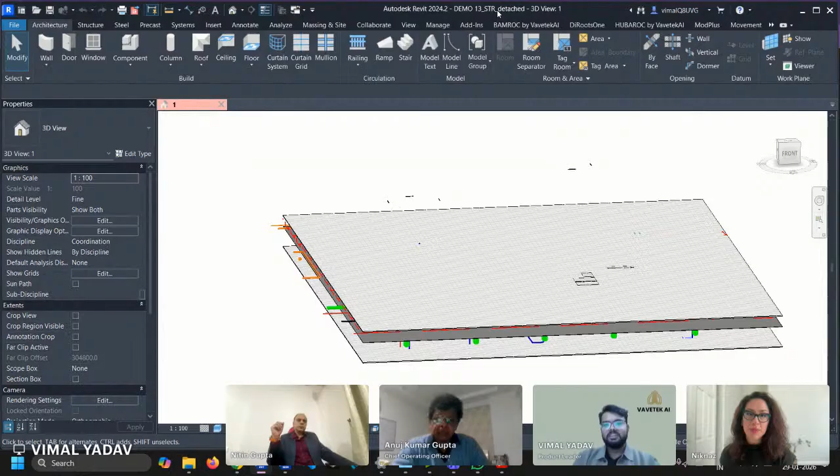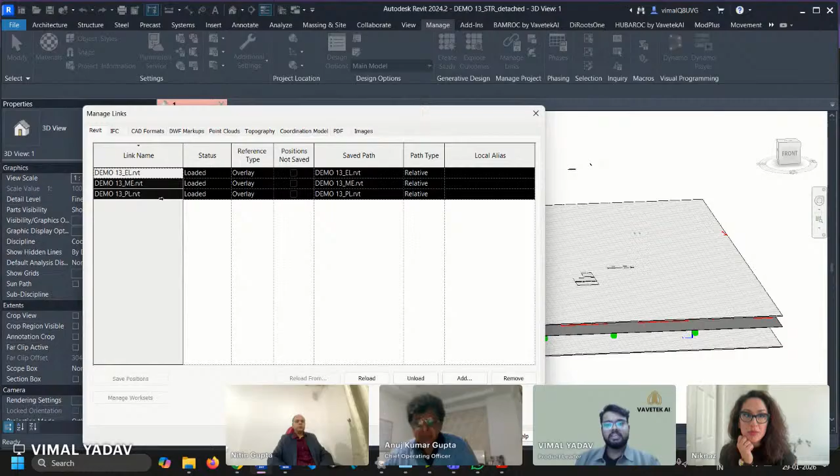Right now we have a structure file here, and what I've done is linked all the MEP files — electrical, mechanical, and plumbing — all linked together. Before running BAMROC, first I want to detect clashes, so I've already taken a Navis export of this. I'll simply use Navisworks to detect those clashes. Let me simply append these files, which would be here.

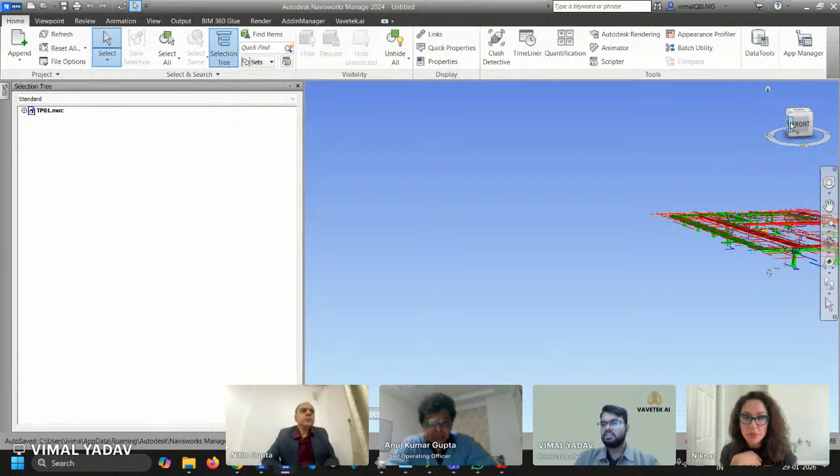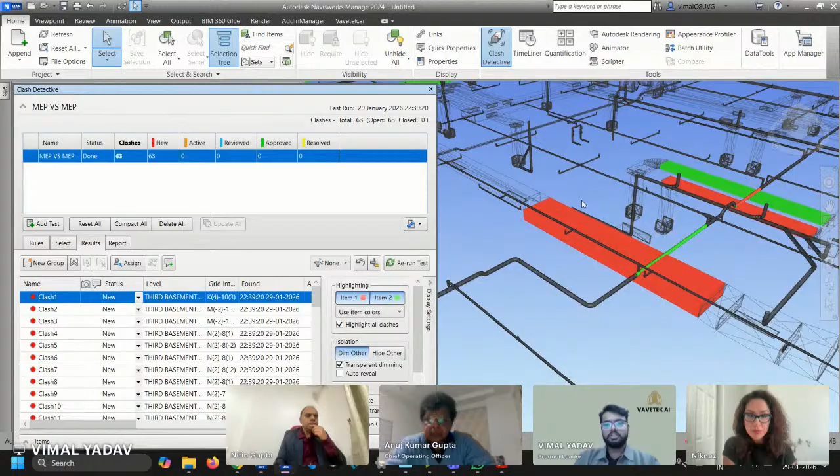So this TP01 file represents the before situation of the model. Right now we have all the MEP here. What I'll be doing is running a simple MEP versus MEP clash test. Okay, great, so we have about 63 clashes in this particular model.

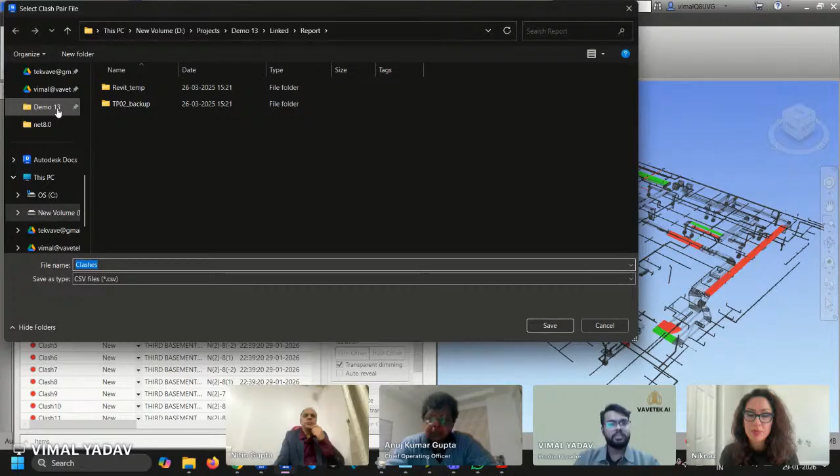Now the next step is to create a report of these clashes, and then we'll be running BAMROC. We have our own plugin here within Navisworks, and this BAMROC clash file is going to create that report for me. I'll replace this existing file.

Okay, great, so we have generated the clash test. We have generated the report as well. We can head back to Revit and run BAMROC.

Now, first of all, I need to check on this section box. This is important to run BAMROC. Also, this is helpful in running a particular portion of the project. So using BAMROC, you can resolve clashes floor by floor, tower by tower, or just in the corridor. All you have to do is adjust the section box and BAMROC will take care of the rest.

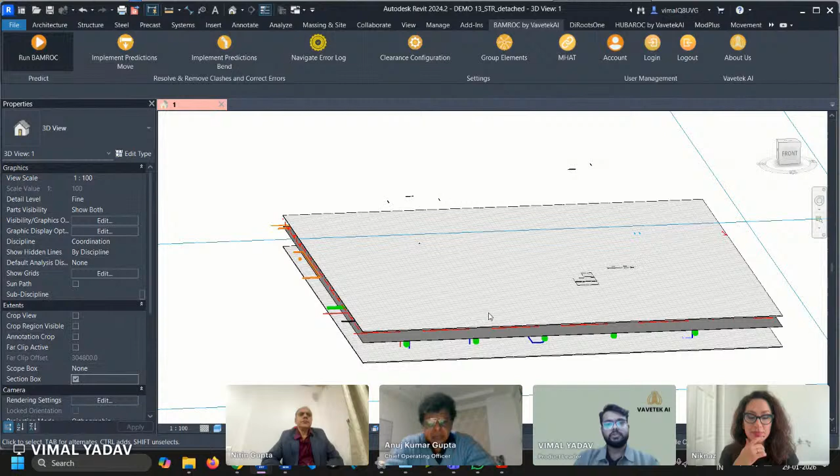So now I'll simply click this Run BAMROC button. There are some guidelines, I'll quickly jump through them. First is that I need to link all the files.

As you saw earlier, I had opened the structure file and linked all the others. So if I have an architecture file and interior design file, I need to link those as well, so that the software has the right context of where exactly the boundaries of the false ceiling, of the floor slab, or just the walls are.

Now, second point is regarding those projects where you might not have a false ceiling, such as basement car parkings or office spaces. What we recommend is you simply draw a reference false ceiling at the minimum clear height, so that BAMROC knows that this is the final limit where the MEP can go.

Now, third and fourth point are just an extension of this. What BAMROC is doing is resolving clashes in the false ceiling area. So we want our MEP systems to be within the floor slab, within the false ceiling, and the external boundary walls. Now, fifth point, very important.

We see across the industry in all the projects, engineers will model out these MEP systems but would not connect the elements properly. That creates a problem since then BAMROC is understanding a single system as multiple systems, and it cannot adjust those systems properly. It might go haywire.

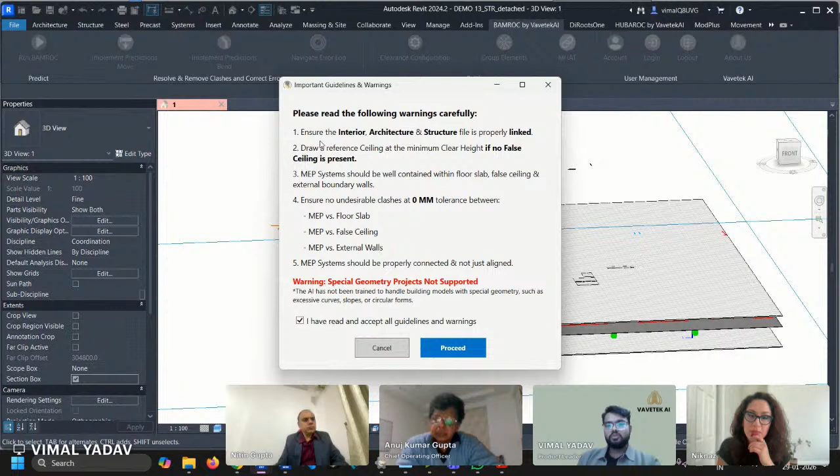Now, I would like to mention here that right now BAMROC has been made to handle the majority of the projects happening in the world, but there are some boutique projects with special geometry which BAMROC cannot handle at the moment. So that's a limitation. Something like buildings by Zaha Hadid are some of those. Anyway, we'll proceed now.

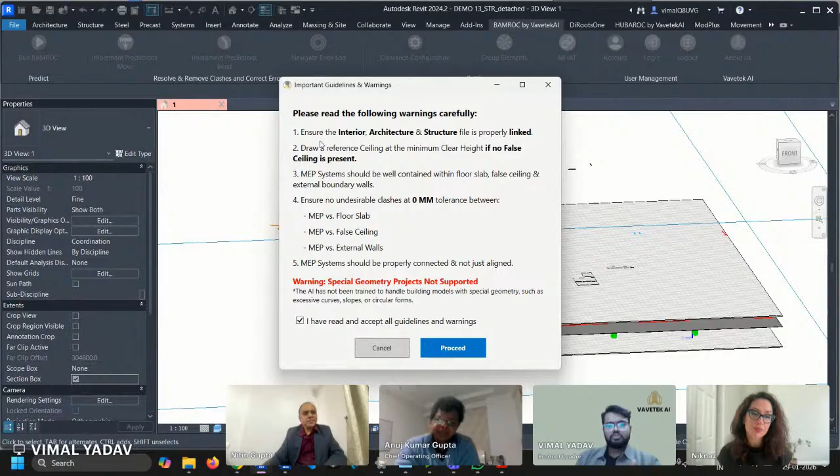Okay, so this is a health check. I'll come back to this later. I'll close this, and now I get to choose from these two strategies.

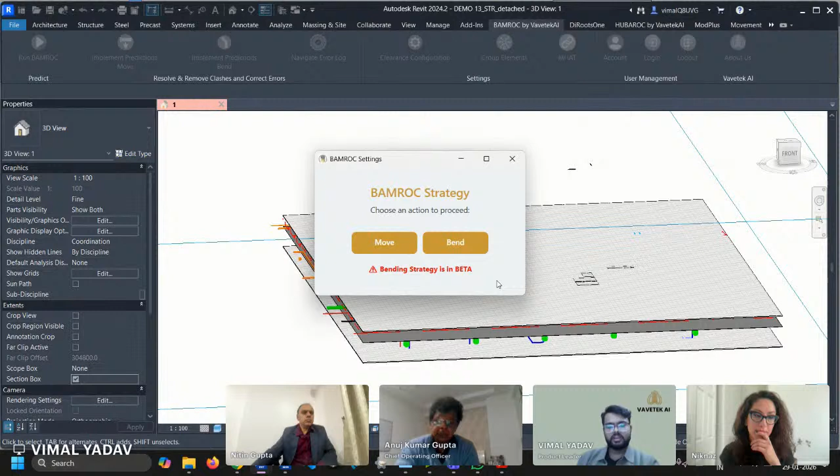So move and bend. As the naming suggests, move is going to move the elements, and bend is going to bend the elements or systems to resolve the clashes. I would also like to mention that BAMROC fundamentally does not create new clashes. You can use either of these strategies or algorithms. For now, I'll go ahead with move.

Okay, so it's asking me, is the project north-south aligned? Yes, it is. If it is not north-south aligned, you can simply rotate your section box and it will just work fine. Now I can choose the performance mode for this project.

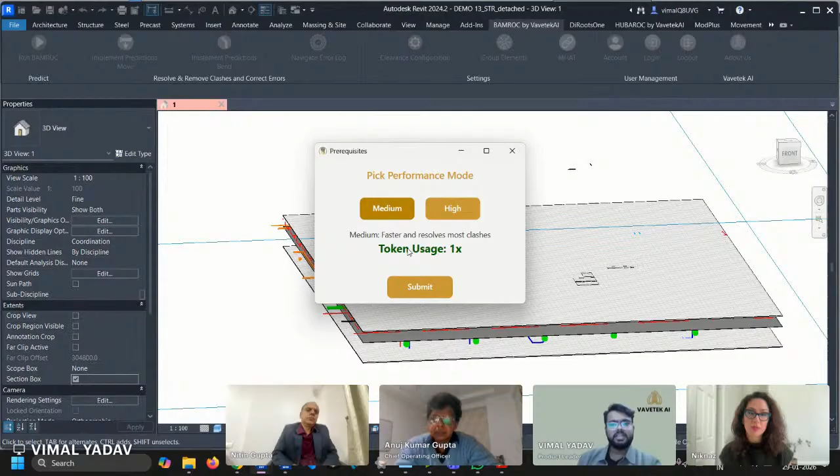Now this is a simple project, not a lot of density in the clashes, but if you have a lot of congestion in the MEP systems, you can use the high mode to resolve even more clashes. It thinks almost 10 steps ahead of the medium performance mode. Let me just hit submit.

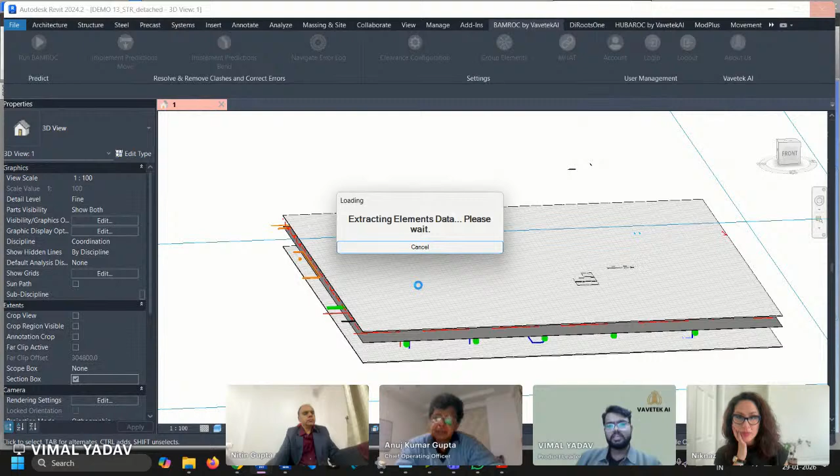Right now it is basically collecting the geometrical, mathematical information from the models. So it's collecting all the information, the geometry of your walls, of your false ceiling, of your MEP systems, everything. So this shouldn't take long.

Almost done, I'll go ahead. Okay, so we have 4 Revit files here, but BAMROC can handle almost 20 or 25 Revit files. If your own machine can load these files, you can link them. It's perfectly fine for us.

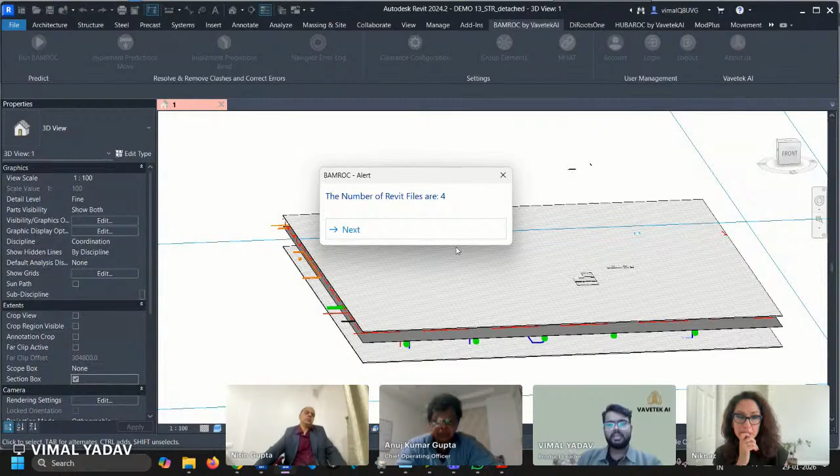Okay, now I need to upload the clash file. This is the same clash file that we generated earlier. I'll click yes.

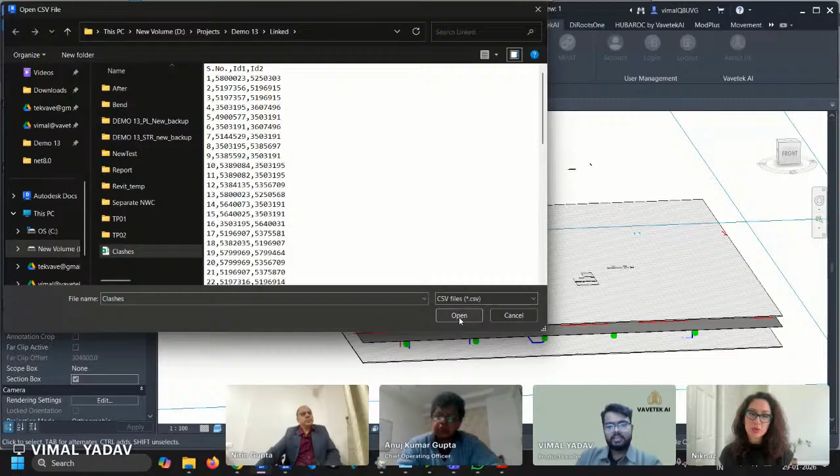And let's actually take a look at this also. So you can see this clash file is nothing fancy, just element IDs of the clashing elements. I'll simply open this. Okay, so this is a small project, 4,000 elements, but we have worked with hundreds of thousands of elements also.

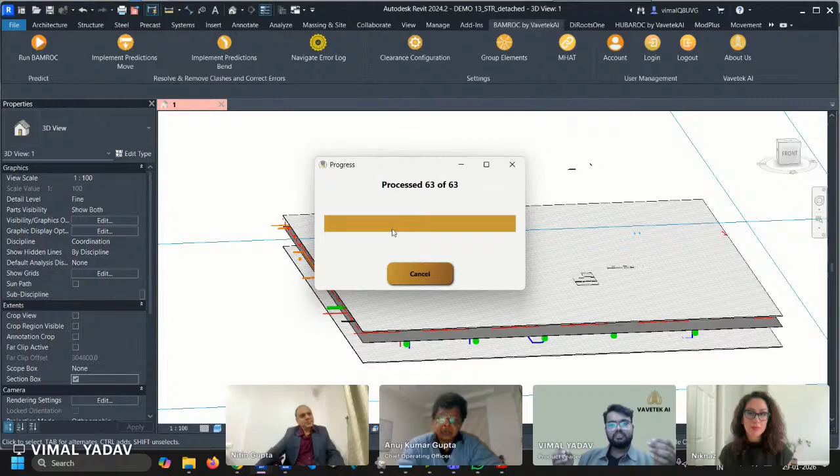So size of the project is not a problem. Okay, tokens we can come to later on. Now here's the magic happening in the cloud. All these clashes are getting processed on the cloud, and BAMROC will one by one generate predictions for all of these clashes, and download a prediction file in my downloads folder. For this project, it's almost ready. For much larger projects with thousands of clashes, it could take 20 to 30 minutes or so.

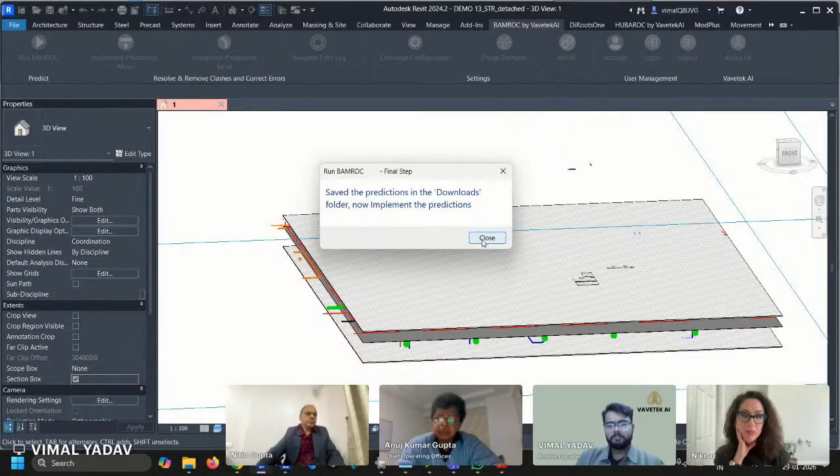Okay, this is also fine. Now, this is an interesting part. Till now, my model has not really changed. I have only generated predictions from BAMROC, right?

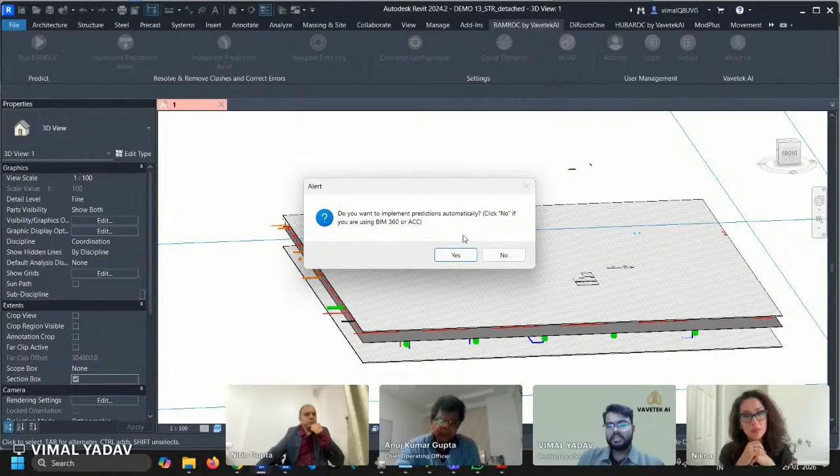Now, the next step is to make the changes in the MEP files. And for that, I'm going to automatically have BAMROC implement these. But if we are working with BIM 360 or ACC, what I need to do is use these two implement prediction buttons that you see on the top, right? So now this could take a couple of minutes.

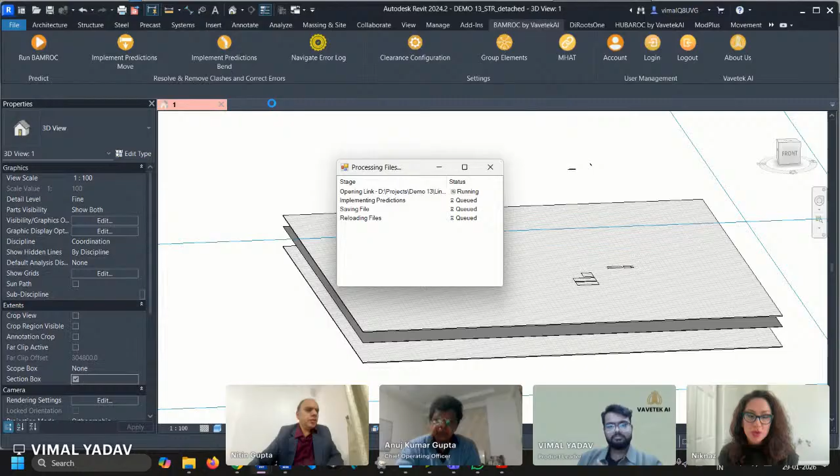So I think we can take some questions as well. So Vimal, why don't you rather go over the regular frequently asked questions? Sure, from your memory, we can do it.

Can I actually ask one before you do that? So now that it's processing in the background, are we also able to see like visually all the clashes? I think we will, right? After it's done.

So we will be actually generating a visual report after all the predictions are implemented. Got it, I have the final resolutions, and I can actually see. So we have developed a tool which can generate a visual report for you, and you can actually go clash by clash, see how it looked earlier, before BAMROC, and how BAMROC has resolved it. So we'll do that also.

Because there is an interesting story behind this. When we initially developed the algorithm, this was a very regular anxiety, what is the software doing, right? So in fact, what we used to do was go clash by clash, element by element, and literally go into Revit and see what the software did to resolve the clashes. So then we finally said, why don't we make a tool out of it?

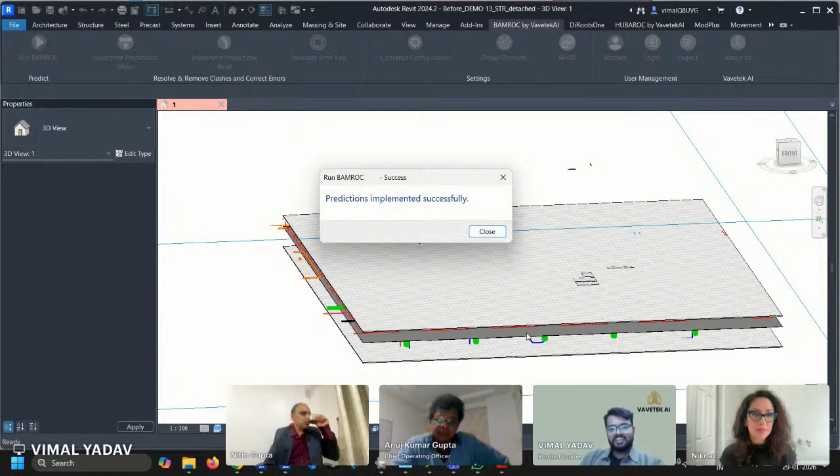Great, so we'll go ahead with Vimal continuing. So basically the clashes are now resolved. We have the revised Revit files.

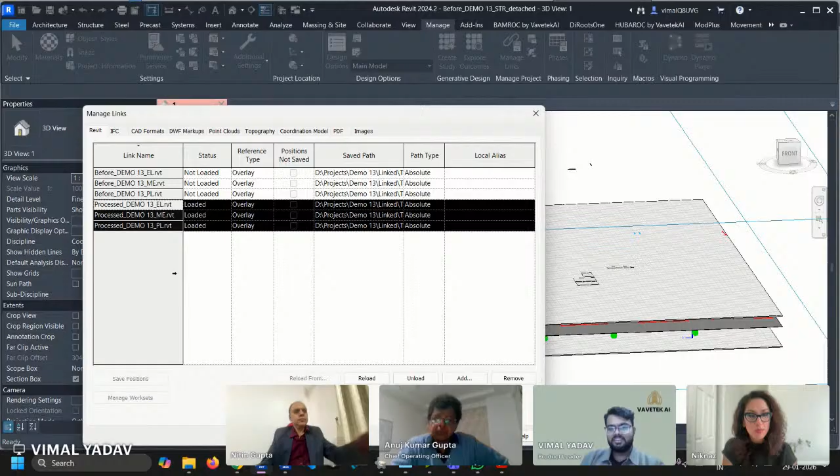So if I go to manage, you can see I had these before files. These had clashes. Now I'll simply unload these. These three processed ones are clash free. I'm going to take them to Navisworks and we'll see live how many of those clashes are now resolved, and we'll also check them subjectively. Let me quickly export my files.

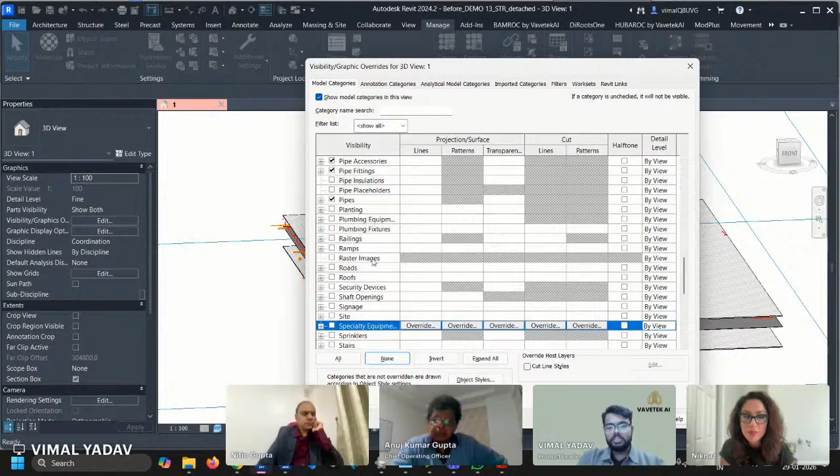So I'll take cable trays, duct accessories, fittings, mechanical equipment, and pipes. Although in this demo we are only showing MEP versus MEP clashes, BAMROC can resolve MEP versus structure clashes also. That is also supported.

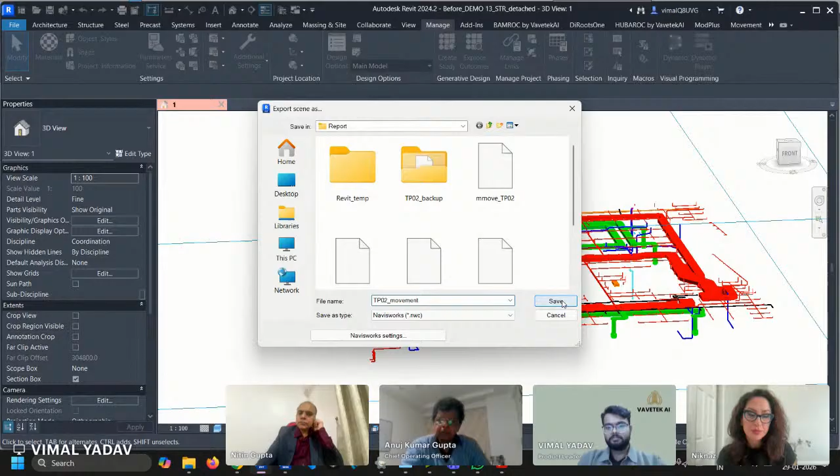Let me give it some name. Let me do TP02 movement. Since this is a smaller model, it shouldn't take long.

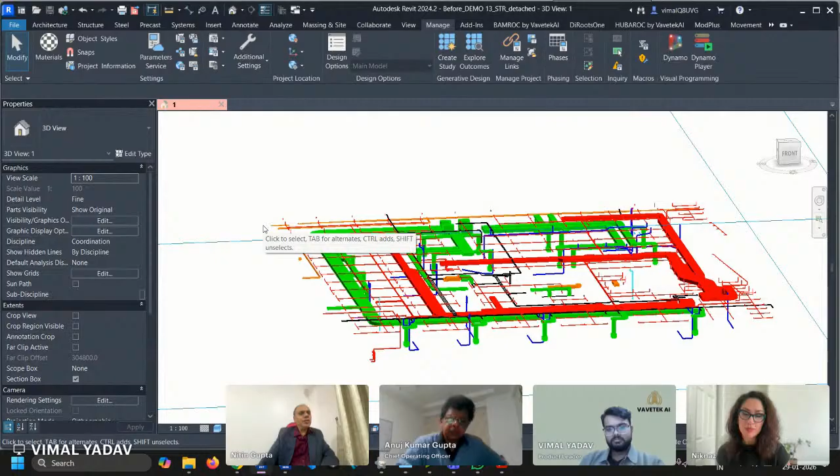Something very fundamental is no new clashes. That has been the mantra from the beginning. And believe me, we are still facing a challenge. We still keep getting surprises. However, with more tuning, improvement, and development, we have been able to bring down the number and percentage of new clashes to virtually zero.

However, we also have learned that the whole industry around the world, regions work with their own level of standards, the BIM standards as you may call it. So there are challenges that keep coming for the software. Okay Vimal, go ahead.

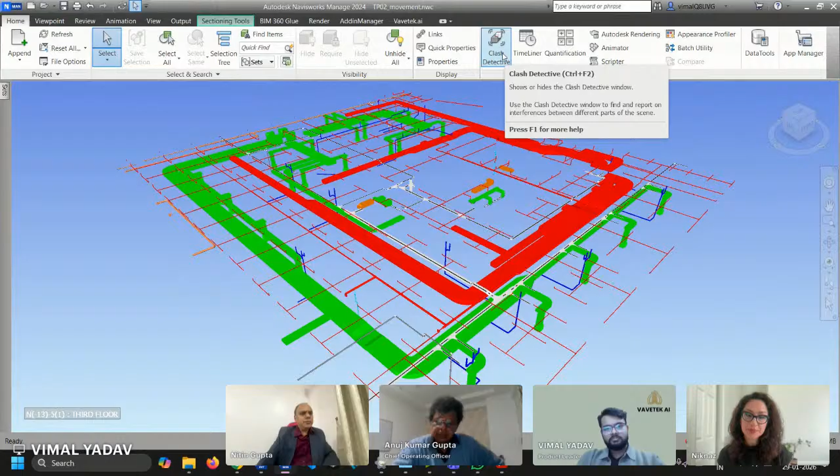Right, so we have the Navis file of the resolved model, and again I'll be running a simple MEP versus MEP clash test, just like earlier. Great, so we are left with only four clashes now. Now what I want to see is how those clashes got resolved, so I'll be creating a visual report.

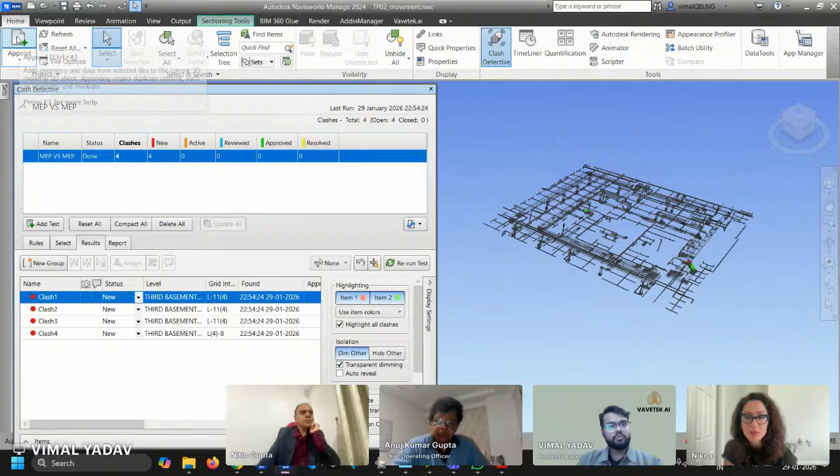So I'll get my before file from there, the TP01 file. Let me also rename this clash test as TP02 and this one as TP01.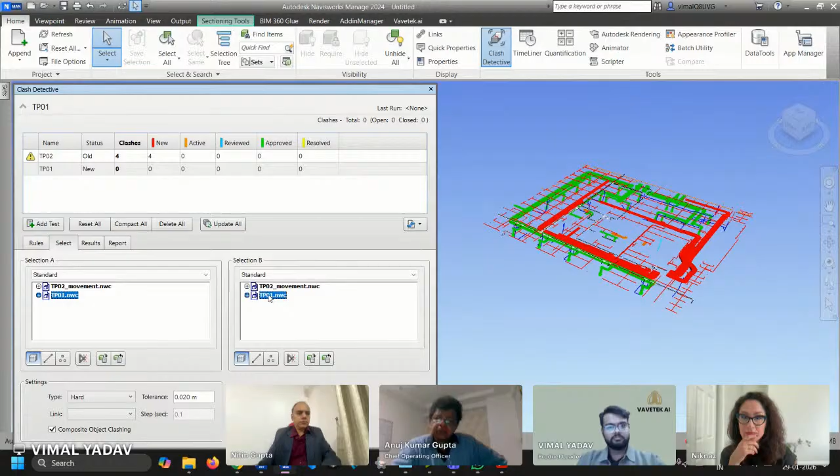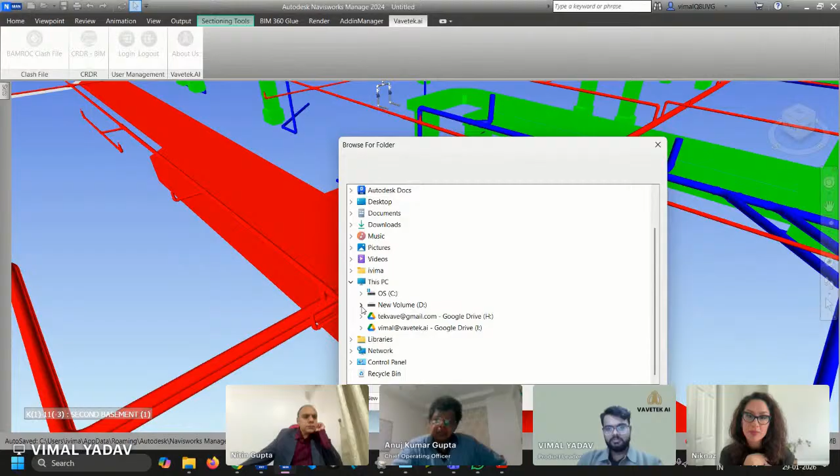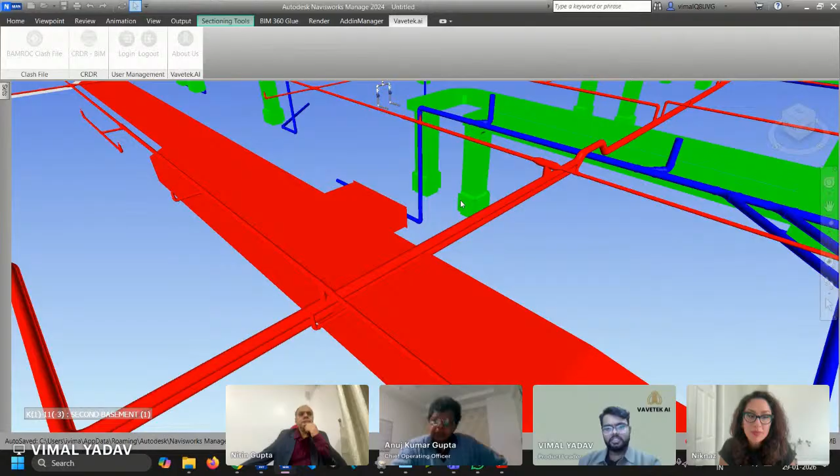Okay great, so we'll go ahead with default settings. We'll check for new clashes and also include pictures. Now for these many clashes, within 15-20 seconds we should have the report ready. For 1,000 clashes or so, it could take 5 to 10 minutes to generate. It's basically clicking pictures right now, and that saves a lot of time.

So within 10 minutes it can generate the report for thousands of clashes. Not fix them—what I meant was you can generate the report within 10 minutes for thousands of clashes.

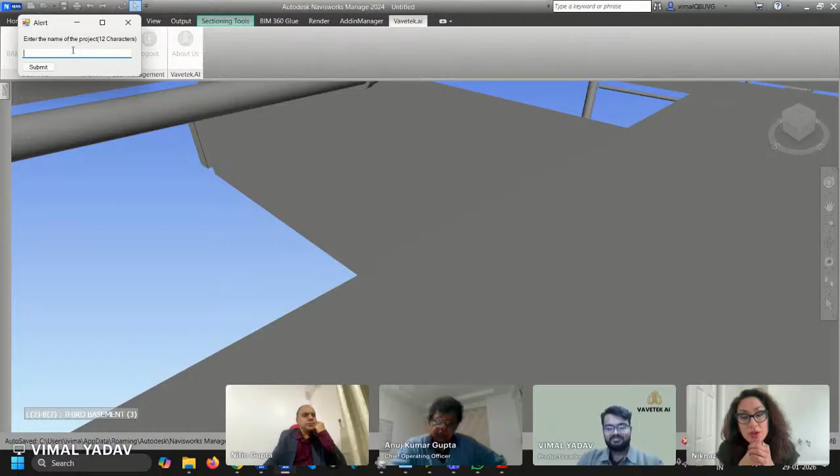Now, this is for this tool, but with BAMROC you can actually resolve 500 or maybe even 1,000 clashes within an hour or two. So, within an hour. Sorry, I interrupted you.

On average, we have seen that for large projects, we are around 10 to 11 times faster than the manual methods of resolving clashes.

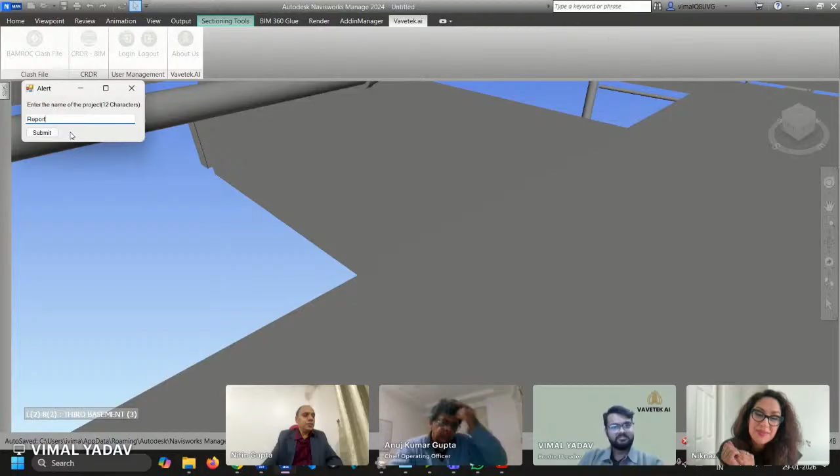That's awesome, I was just going to ask that, comparing. So how long would it take a team of, I don't know, maybe just one person to take care of this manually? At least a week, I guess, right?

So going through it, the average of the industry is that a modeler or coordinator is able to solve 60 to 75 clashes per day. Oh wow, okay. And that's the average. It's a very painful process, it requires a lot of back and forth.

So as you saw, we were able to solve these 63 clashes in, we've just spent around 15 minutes running this program. But I would say Vimal had made some setups earlier, so those setups require another 15 to 20 minutes. Then give it another 15 minutes to understand the project, and finally to validate the resolution.

And then some of the clashes that are left, four new clashes that we are seeing. So overall, I would say this project end to end would not take more than 50 minutes. Something that required a day to solve, we are able to solve in 1 hour. This is the kind of efficiency you are looking at.

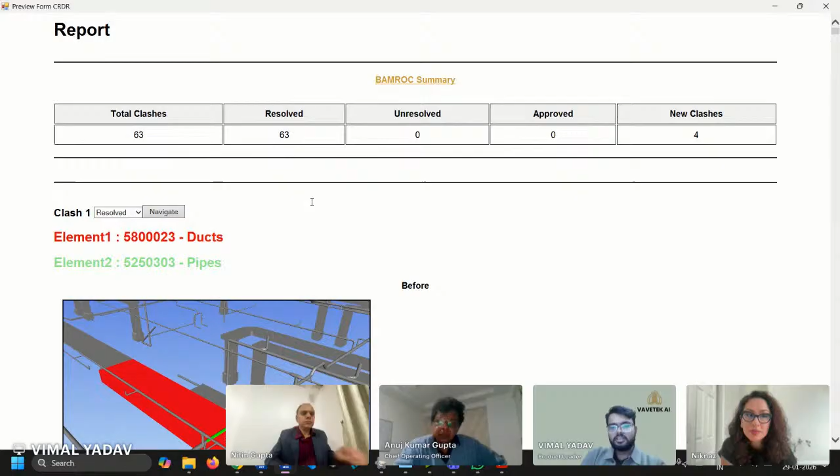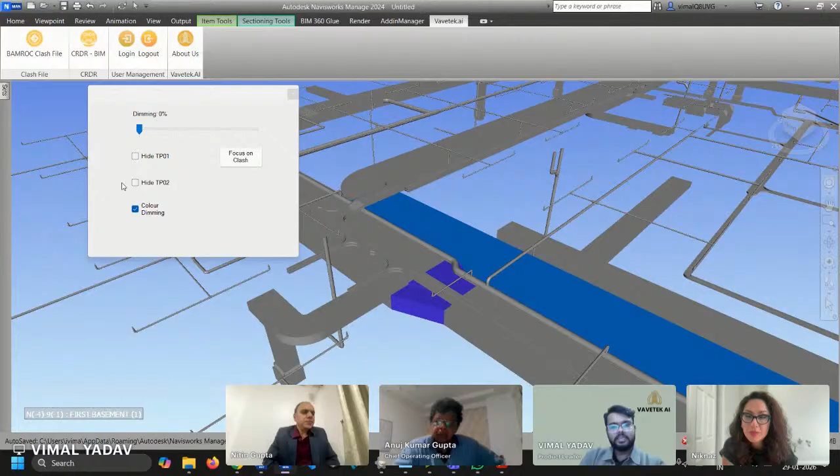Definitely. As you can see in the summary at the top, 63 clashes are resolved. Now, in a lot of cases, things might not be resolved, and I can check them as approved if they are. Let me go through one of the resolutions and show you how it's done. In this report, I can hit this navigate button and it takes me directly to the model. So what I can do is hide my resolved model and see how it looked before. Let me check off this also.

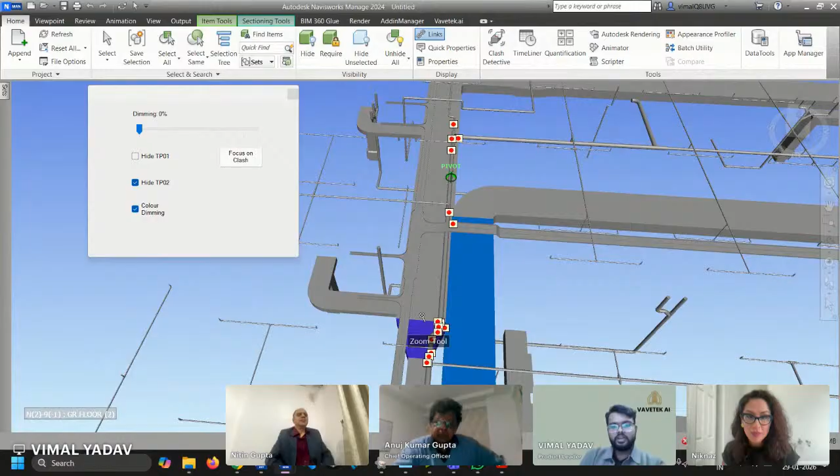So these red dots you see, these were the clashes earlier. This pipe was almost inside the duct, and these two ducts are also clashing. There are some more clashes over here. Now let's check what has happened after we have run them.

Okay, so basically I switched and now we are seeing the resolved model. The clashes are now resolved, and as you can see, the design has not changed fundamentally. The design stays the same. I would say that is one of the wonderful things about BAMROC, that it does not change your design. You are the owner of the design. BAMROC is only resolving clashes by making very minimal changes in the model.

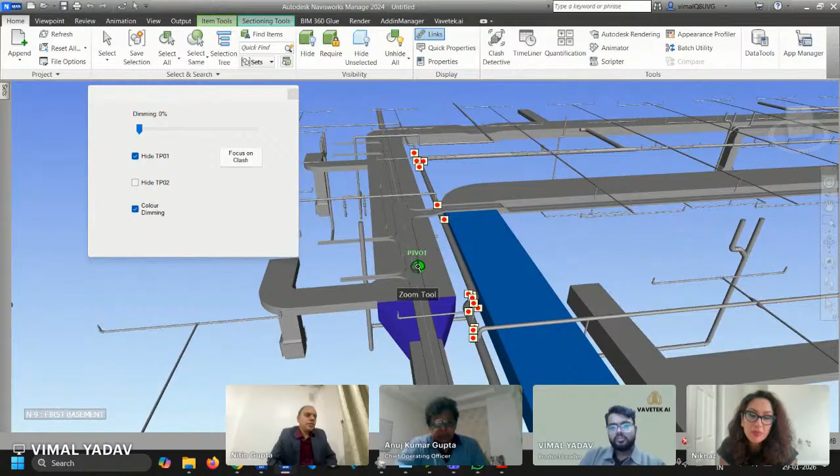Absolutely, so this is... yeah, sorry, please. I was just wondering about code compliance, because codes are all different all over the world. So how does that work as far as the dimensions, the duct, the slope, and all that? How do you take that into account?

Okay, great question, Niknaz. So what we are fundamentally trying to do is make the rules as modular and as flexible as we can, rather than making it customized for different codes. We are trying to build in features that let the customer create their own settings.

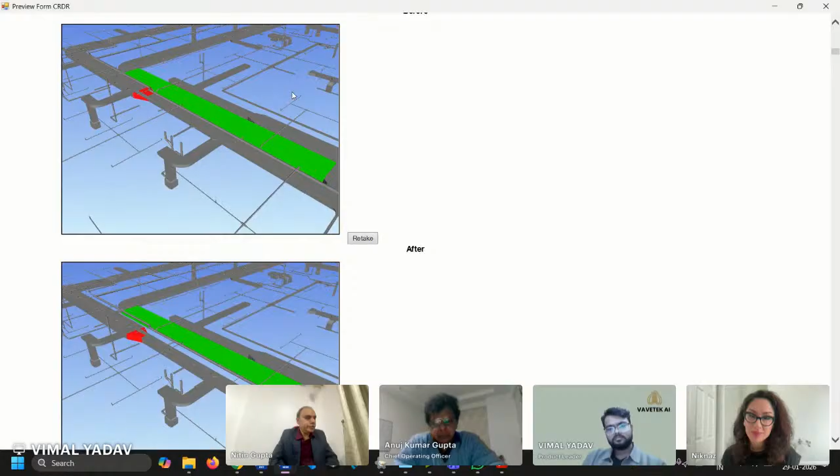For example, if you want a maintenance gap between two different kinds of services — a lot of times we hear, and as an architect I've experienced this myself, that a cable tray is an element that requires maintenance. So between a cable tray and any other service, you should have a gap of 300 mm; that's the ideal gap. You can specify this. We have a feature in the software which allows you to specify the clearance around the element, both horizontally and vertically. That's a setting the modeler, the BIM coordination team, or the MEP coordinator can do, and it can be done region-wise, whatever settings they want, and the software will follow that.

So this is just an example; there are many more rules that are built in and can be built in. The idea is that tomorrow, if a customer says they always want electrical cable trays to run above water supply pipes, we can build that as a rule. Right now we haven't, because we don't see that as a regimented rule followed everywhere. However, if a customer wants that as a standard for their own company, sure, that can be built into the software, and the software will keep following it.

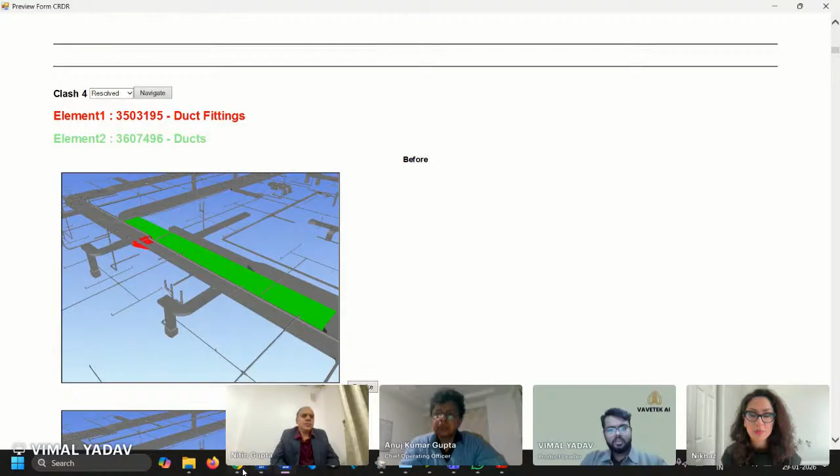Sure, so Niknaz, at this moment maybe we can just show our PPT. Vimal, why don't you go straight onto that world map that shows our present outreach? Yeah, that'll probably be a good way. Okay, I'll have to switch my screen. Just give me a moment, we are done with the demo. Yeah, play it Vimal, meanwhile I'll just keep talking in the background.

So Niknaz, we started reaching out, I would say, to potential customers for beta testing back in April last year, and we beta tested the software for around 5 months, and that is when we launched it formally for the customers. So we have sold a couple of licenses in Saudi Arabia, and what we are observing is that the maximum traction we are getting for the software is in the Middle East, especially Dubai and Saudi Arabia, let me say UAE and Saudi Arabia.

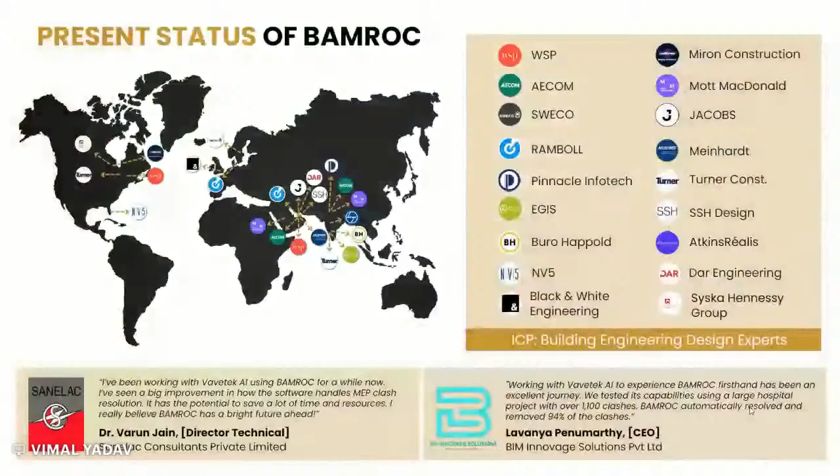Yeah, this is the world map. So this really shows the present situation. On the world map, you can see those dots, which are really logos of different companies. We've reached out to all of these companies, we've given demo to all of them. You can see these are some of the largest companies, but yes, mostly engineering design companies. There are also turnkey contractors who do the clash resolution as a part of their scope, so they are also in touch with us.

I would say the software actively has been used till now by most of our beta testing partners. However, the couple of customers whom we have sold to, they are using it very actively. And then we are looking ahead to a paid pilot with some of these large engineering consultancy companies. So as of now, the information is confidential, but very soon, once we are doing the paid pilots, we'll be able to take their permission to name them.

This is very impressive. These companies, some of them are global companies like Ramboll, AtkinsRéalis. These are like global leaders in the space. So it's very impressive that they've been testing and piloting your product. Thank you so much.

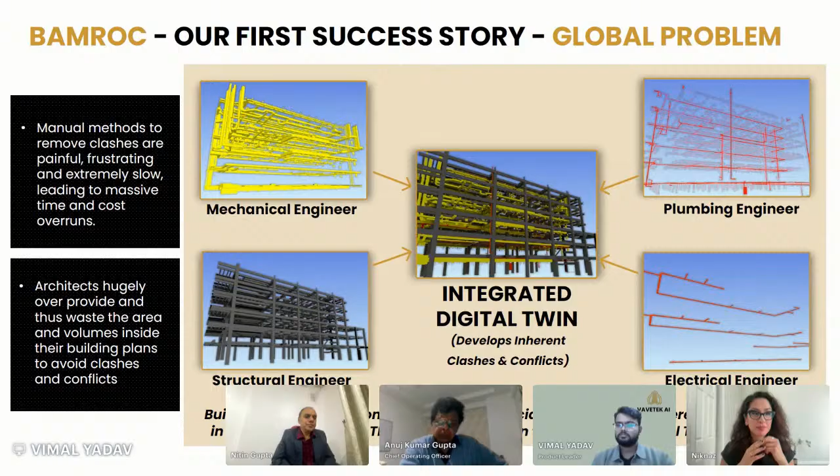Okay Vimal. As we showed this slide already, we can skip this — I think you've given a live demo already. Frequently asked questions we've been through, so you carry on.

On privacy and data security, we are right now not retaining any data at all. The data, as you saw, is just mathematical data that goes to the cloud, gets processed, and sent back. That is what we are doing.